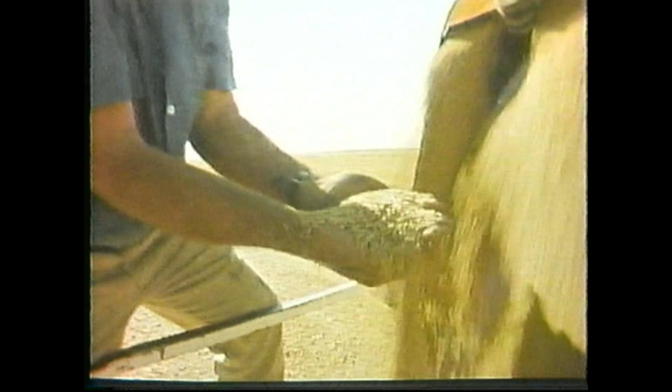Still, some are saying wait till times get better before upgrading your harvesting equipment. Well, maybe they don't have their money sitting in the field like you do. Look at it this way: if ever there was a time to introduce greater efficiency into the business of farming, this is it.

We know you're looking for ways to improve harvesting, so we committed ourselves to designing a new size rotary combine. But before we put pencil to paper, we had to ask a few more questions. So we went to the country looking for what you want in a combine, and we came back with a number of ideas on how to build a really productive, cost-efficient combine.

It was clear that you want to put more clean grain in the bin. You want reliability because you can't afford downtime when the crop is waiting for you to harvest. You want comfort and ease of handling - after all, you put in some long hours during harvest. You also want maintenance and service to be easy. And something extra important these days, you want a rotary combine that's affordable.

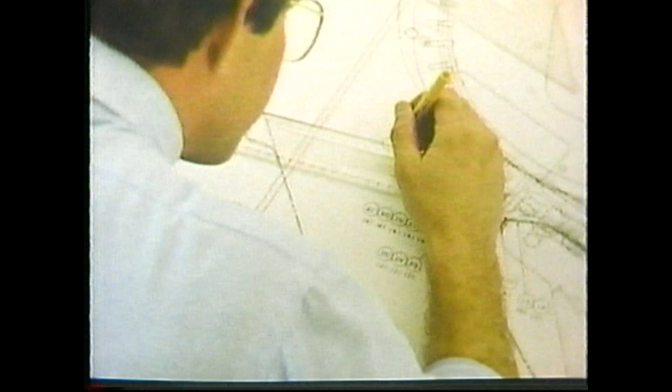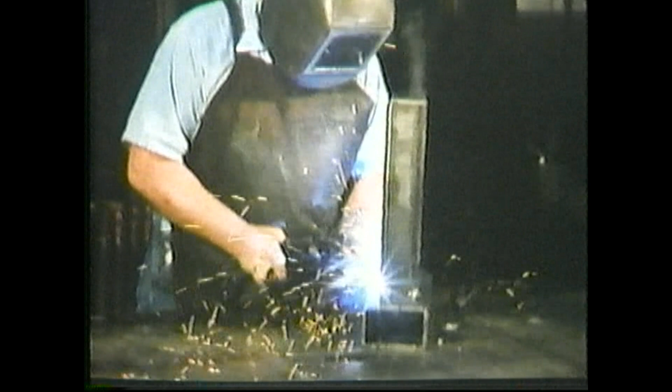With your ideas in hand, we went to work designing a new size combine using proven Gleaner combine technology. We looked into the tiniest components for ways to bolster strength, to bring you a truly reliable combine. Then we tested and tested and tested, just to be sure this new machine really would be all that you expect it to be. Throughout the engineering of this new combine, our aim was to bring to reality a new size combine with high efficiency, to build a combine that stands apart from the ordinary.

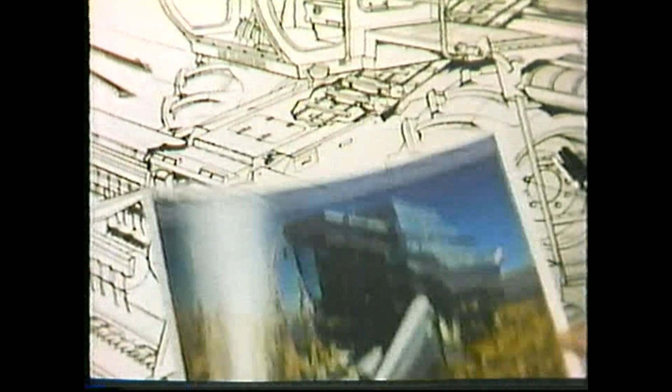Introducing the new R50 rotary Gleaner combine, built with your ideas - to put more clean grain in the bin, to run reliably throughout harvest, with ease of handling, with comfort. A combine that's easy to maintain and service, and one with the benefits of rotary technology at the price of a conventional combine.

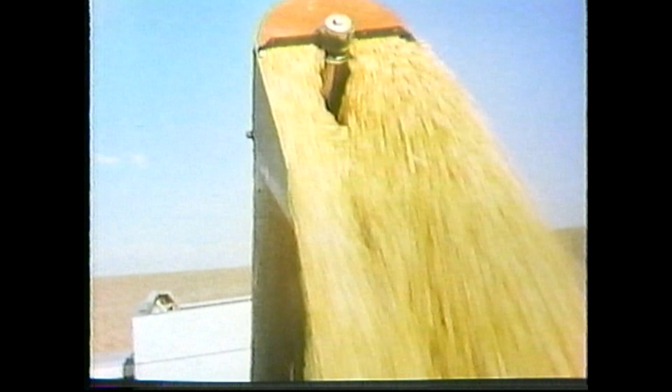It's sized smaller than our R60 and R70 rotary Gleaner combines, yet it's big enough to handle medium to large operations. Item: natural flow harvesting.

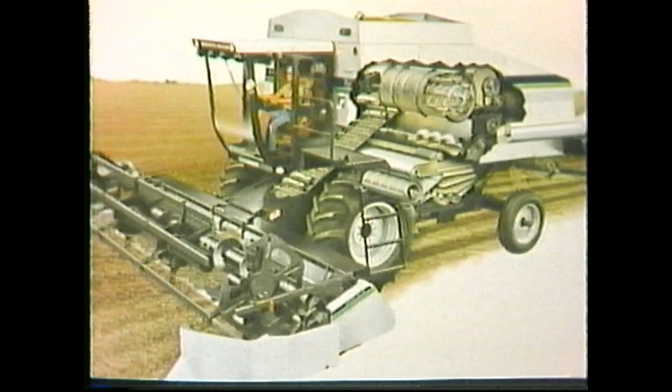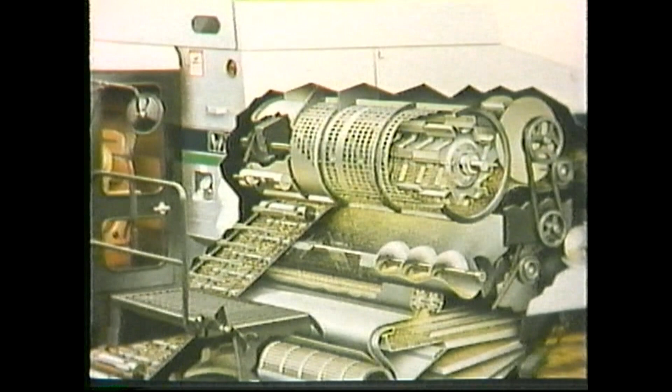The key to the Gleaner rotary technology is its natural flow harvesting system. No other make of combine, rotary or conventional, can match its productive action. The difference is the transverse-mounted cylinder. The crop feeds into the cylinder just the way it comes from the header. Other rotary designs must change the shape of incoming crop mass to a spiral before entering the cylinder. This twisting and turning often bunches the crop and limits harvesting efficiency, especially in tough harvesting conditions.

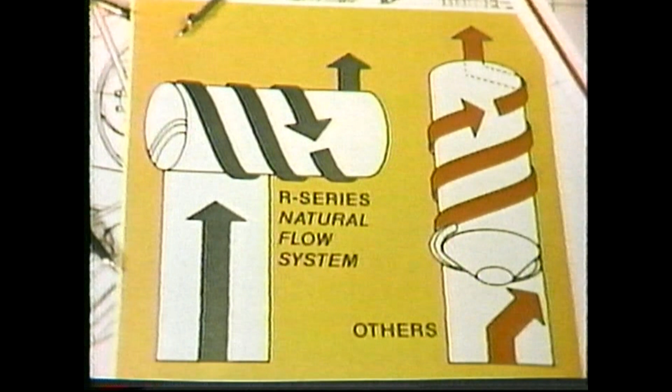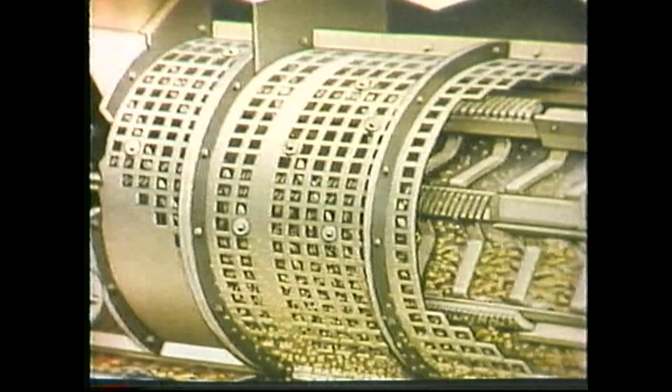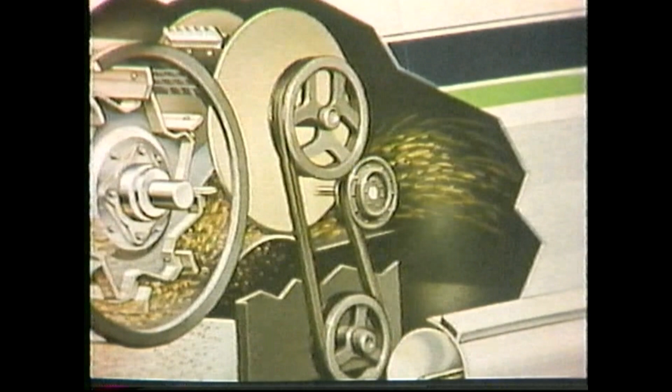You get separation at all points of the R50 processor because it's perforated around the entire 360 degrees of the cage area. That means more complete threshing and separating under heavy crop conditions and less trash in your grain. Conventional systems must thresh and separate the crop with just one pass over the concave area, which often means more grain damage and less control of the crop.

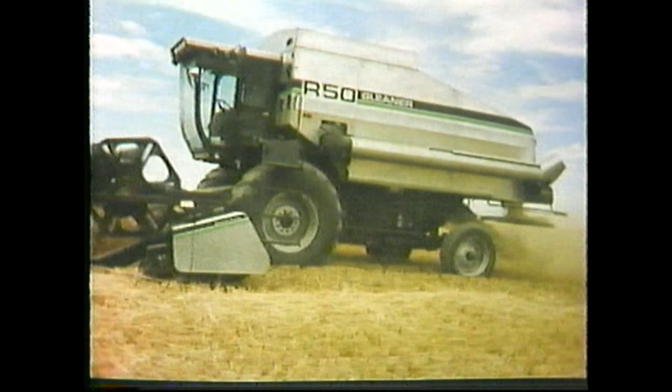The natural flow system in the new R50 Gleaner combine keeps you moving ahead with steady, sure harvesting. It puts more clean crop in the bin rather than throwing your valuable grain out the end of the cylinder or off the back of the shoe whenever the going gets tough. A simple one-side adjustment using one wrench lets you move from one crop to another. You'll have no knuckle-breaking wires or concaves to change.

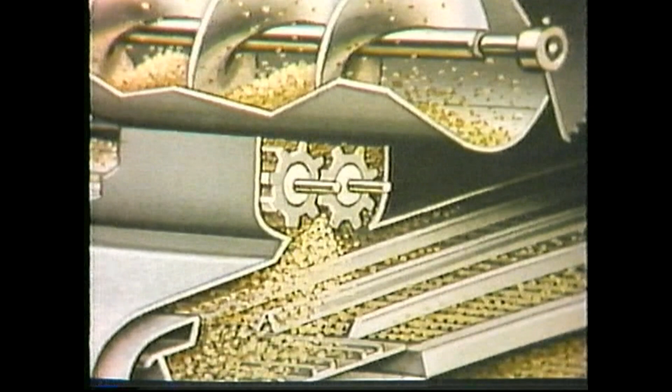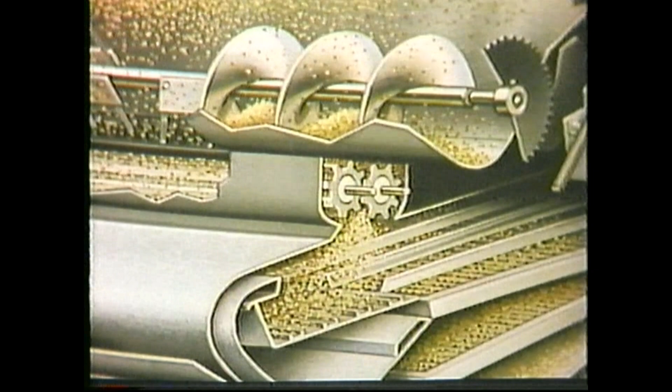Once the cylinder and concave have done their jobs, patented accelerator rolls deliver the crop uniformly across the shoe, even on slopes, so there is very little shifting of grain to the downhill side to slow you down. The accelerator rolls also mean you get 2 stages of cleaning. They propel grain and chaff at high speed through a blast of air. This pre-cleaning means less work for the second stage at the shoe, all of which means that in the end, you get cleaner grain - natural flow harvesting with 2-stage cleaning.

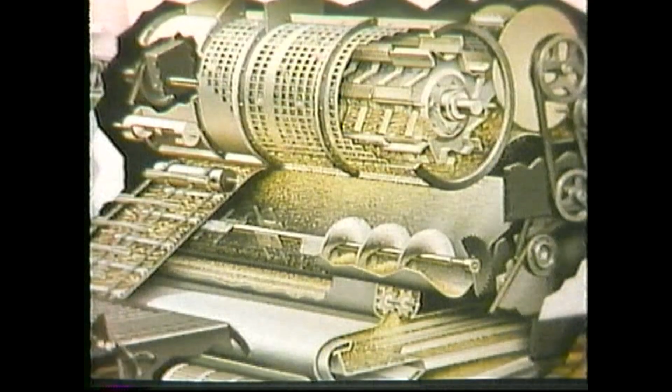It's an important difference that sets the R50 rotary Gleaner combine apart from the rest. Item: performance-proven headers. Your harvesting efficiency can only be as good as your grain header gathers in the crop. And here too, the new R50 Gleaner combine outperforms others.

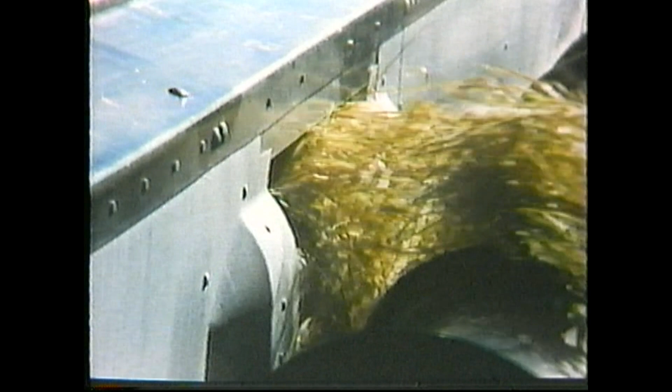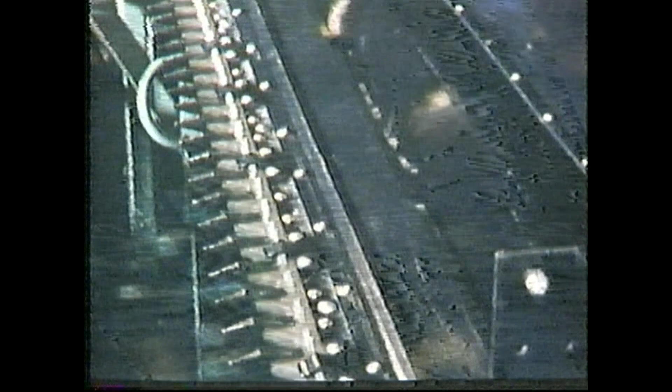As you move through heavy harvesting conditions, you'll appreciate the aggressive feeding of Gleaner combine headers, and you'll find the optional feed reverser very handy. Every Gleaner combine header is factory tested before it's shipped to your Deutz Allis dealership. We don't just spot check a few, we actually test run every header right in the factory to make sure you get the very best performing header possible.

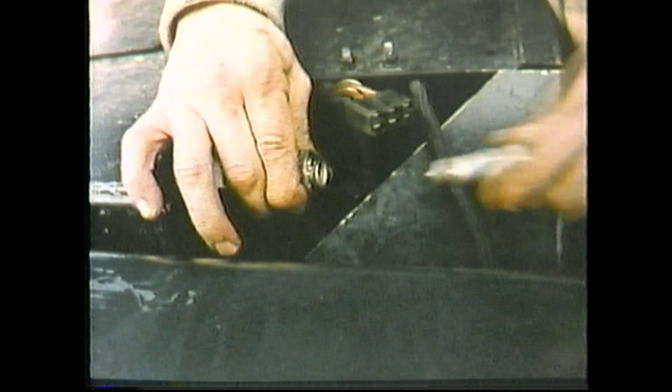You'll really like how fast and easy you can change these headers, and the fact that they are interchangeable with other Gleaner rotary combine models. You get a wide selection, all the way up to 24-foot flex and rigid headers, 8-row corn heads, and a pickup head for windrow crops.

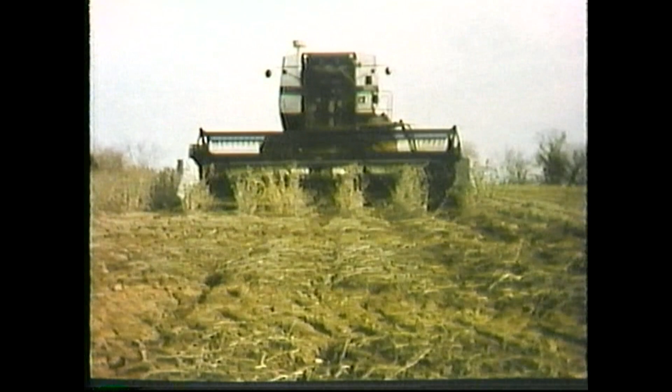Corn heads are low profile to get under stalks and gently lift them without whipping and hairpinning. For soybeans, you'll find our flex headers with 5.5 inches of flex can help you take in more beans per acre. For small grain, choose either the rigid header or pickup header. Both have proven themselves in wheat country.

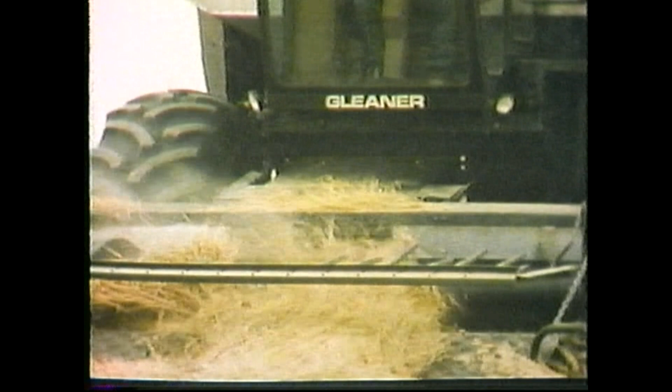This is no ordinary engine. This is the Deutz air-cooled 6-cylinder diesel engine. You couldn't ask for a more reliable powerhouse because this engine won't leave you standing still in the field with coolant problems.

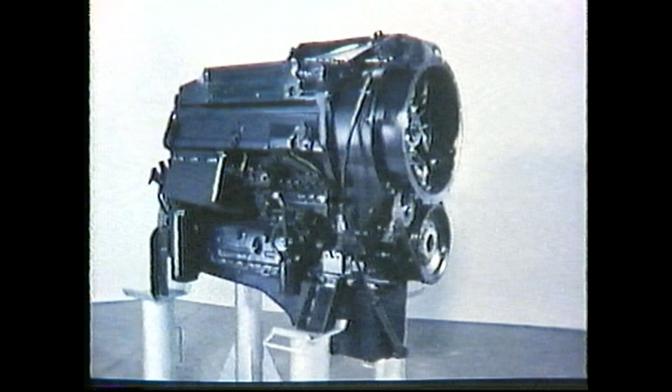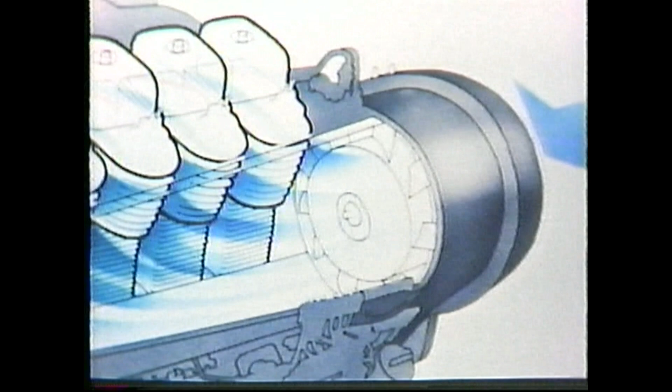Fact is, about 40% of liquid-cooled engine downtime is caused by cooling system problems. But the Deutz air-cooled engine can eliminate all that, as they've been doing for 40 years. Over 3 million Deutz air-cooled engines working in extreme Arctic cold as well as sizzling hot deserts prove how reliable they are.

A look inside the Deutz air-cooled engine shows you how it outperforms other designs. A high-capacity blower forces cooling air around each cylinder and over the heads. Air also passes through oil coolers to keep operating temperatures just right.

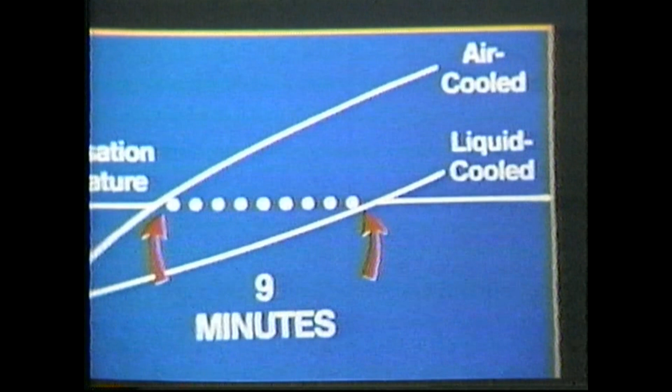In fact, the oil in Deutz air-cooled engines actually runs hotter than oil in liquid-cooled engines, and it reaches operating temperature in 1/3 the time it takes for liquid-cooled designs, which reduces cold corrosion wear and prolongs engine life.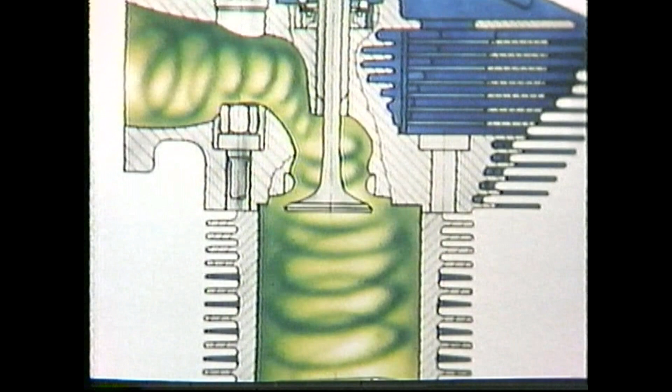This special computer-designed combustion chamber promotes thorough mixing of fuel and air for complete burning. This means excellent fuel economy along with maximum torque backup.

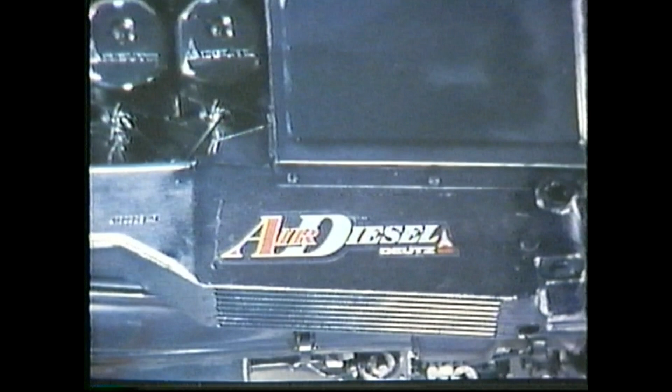Maintenance on the Deutz air-cooled engine involves little more than normal inspection. The air intake blower is driven with a double belt for extra long life. And the modular design makes it far easier to service than most engines. You can actually repair individual cylinders without removing the engine.

The Deutz air-cooled engine is a natural for North American harvesting, for staying on the job until the crop is harvested.

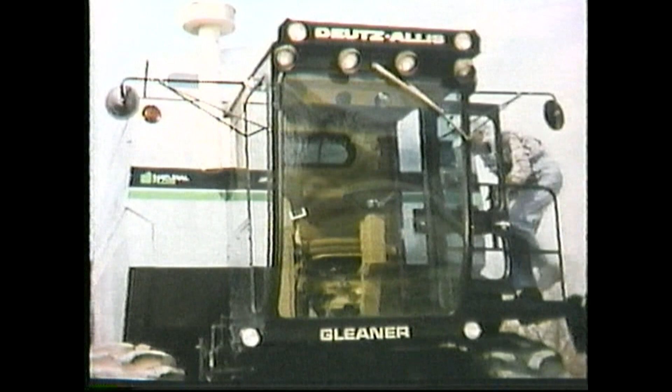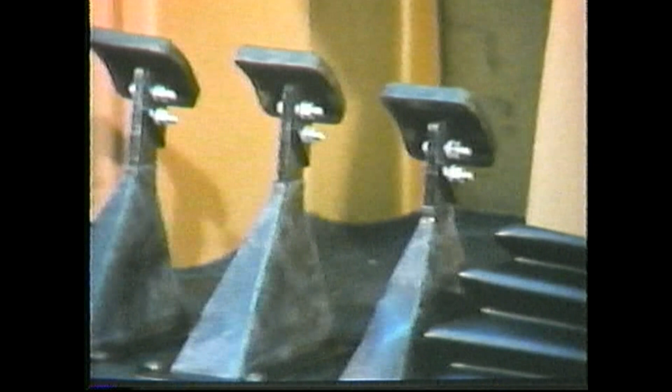Comfort. For those long hours in the field, you need comfort. Inside the Gleaner cab, you'll sit in a quiet atmosphere because this cab is mounted on rubber isolators. And dust covers seal out noise and dirt around the pedals and steering column to give you a dust-free cab.

And what could be more comfortable than a seat like this? The Gleaner Combine Backmaster seat. You'll have adjustments for operator weight, for lumbar support, back tilting, seat tilting, and height. Fingertip controls let you position the armrests.

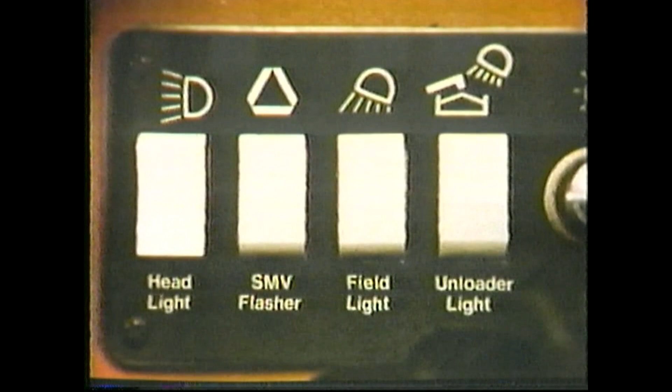Control. Not only does this cab surround you with comfort, everything is within easy reach, and simple electro-hydraulic push-button controls make operating a snap. This is the system that has become the standard of the industry, the system more professional harvesters use. One test drive and you'll see the difference too.

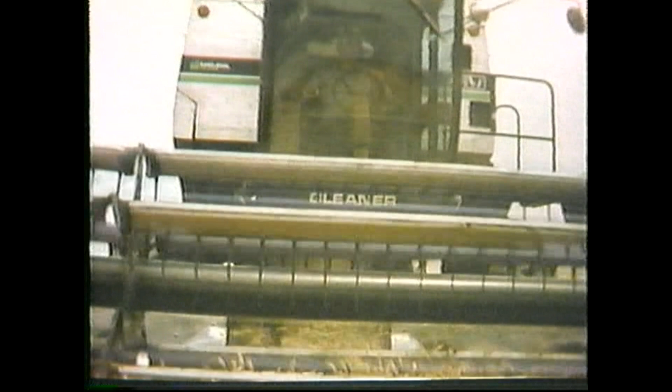And once you get a feel for the Gleaner Combine centerline design, you won't settle for anything less. The balance, the visibility, the traction, the ground clearance all work together to give you superb control. All major components are placed for even weight distribution, so you can expect uniform traction and better flotation.

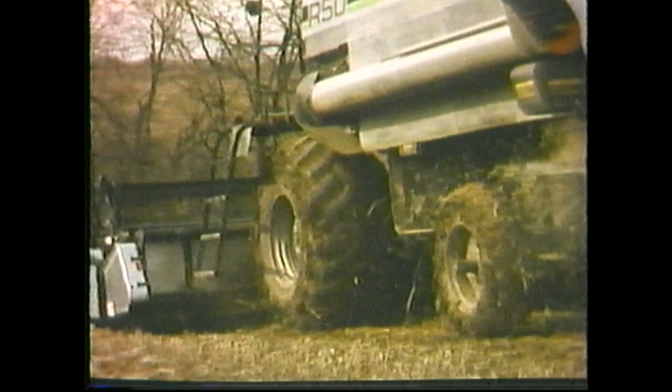And we built in even more flotation with a new high-strength frame. Using an extra strong grade of steel, we built a lighter frame that lets you move through muddy fields with more confidence than ever. And since this is a one-piece all-welded frame, you won't have to worry about it shaking loose and throwing other parts of the combine out of alignment.

With hydro-traction drive, standard on the R50, you'll be able to gauge your ground speed exactly to match conditions. You have your choice of 2 final drive types, one of which includes optional wheel spacers for changing tread widths and allows for the use of dual tires.

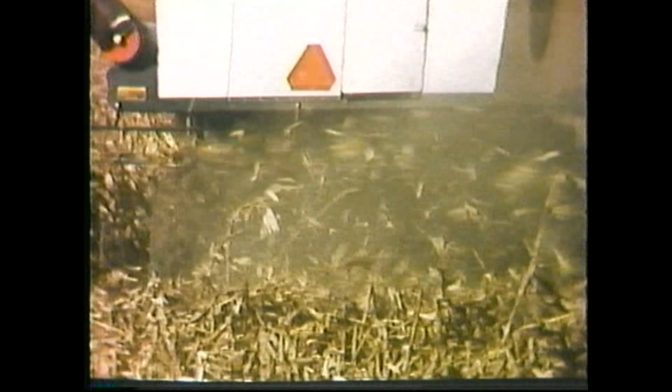It also means spreading straw or stalks just the way you want. With a 2-speed VariFlow spreader, you can adjust the distribution to match the width of your header, a real plus for conservation tillage.

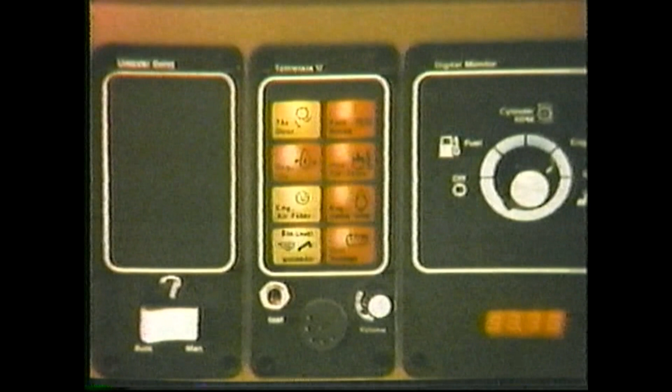Solid-state electronics guide you through harvesting the high-tech way. With a Gleaner Combine Tattletale 5 monitor, you'll be able to minimize downtime and improve efficiency. And an optional bin level indicator lets you know when to unload. Nothing gives you more control of your harvesting efficiency.

Control also means having a bin capacity of 200 bushels to let you take large rounds before unloading. And it means having a high-clearance unloader tube to reach over high-sided trucks and carts.

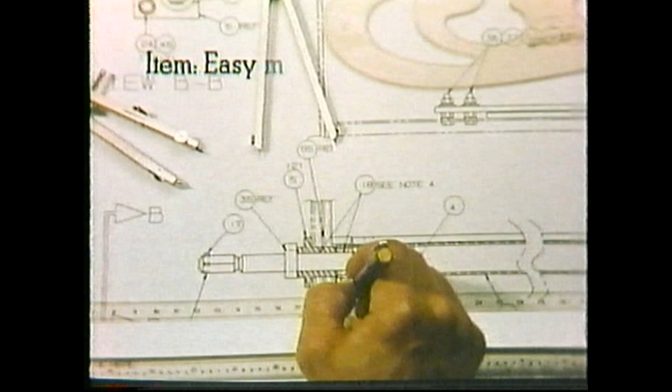Easy maintenance and service. It takes less than a minute to open the rear door and walk into the engine compartment. You'll find the air filter, oil filter, and dipstick within easy reach. Plus, you'll have access to the entire rear of the processor from this compartment.

Side panels flip up easily to expose all belts and other working parts for checking and lubricating, and they close firmly to protect major drive belt systems from weather and debris. Compared with the R60 and R70 models, you'll have 22% fewer belts and chains to worry about in the R50. Which means high reliability as well as easy maintenance.

The new R50 Rotary Gleaner Combine. It's ready to bring greater efficiency to your harvesting. Just listen to what some of the first owners have to say.

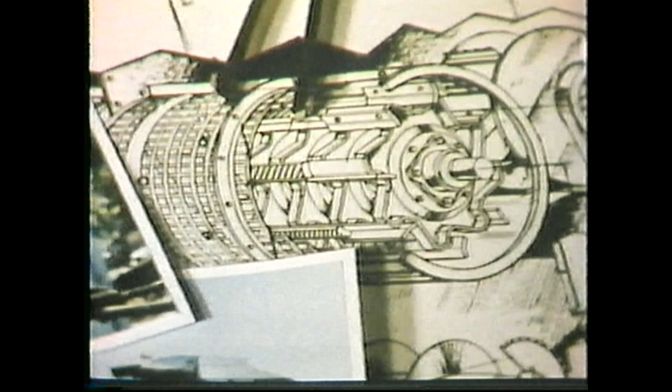The conditions don't have to be quite so right as the conventional combines used to be. It doesn't have to be as dry. It can be a little tough and it'll still knock it out. The engine has less belts, and of course you don't have your water pump and your antifreeze. Like I said, it's just more economical and easy on fuel. With this machine, on these hillsides, I don't have to slow up. I keep running between 3 miles and 4 miles an hour on corn. Do the same thing on soybeans. I've had very little problem of seeing anything go over the back.

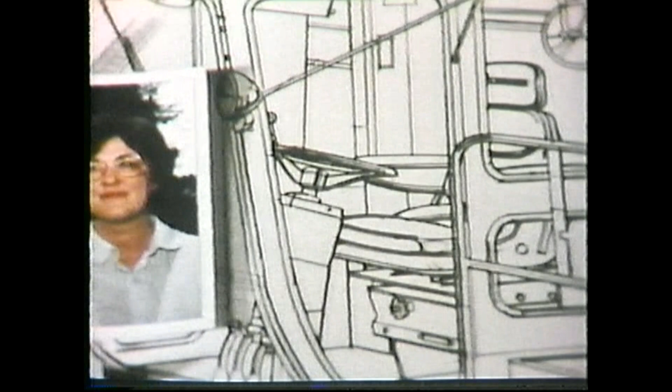It's like being in a Rolls Royce after our old one, because that was quite a thing to handle. And I like the ease of handling. Seems better than the combine we had before.

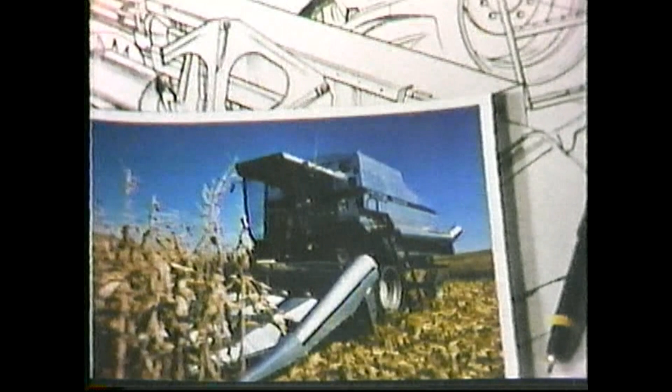The new R50 Rotary Gleaner Combine, a new size rotary, built with your ideas. It's all the things you'd expect from a Gleaner Combine. And best of all, rotary efficiency for the price of a conventional combine. See what sets us apart. See the new R50 Rotary Gleaner Combine.